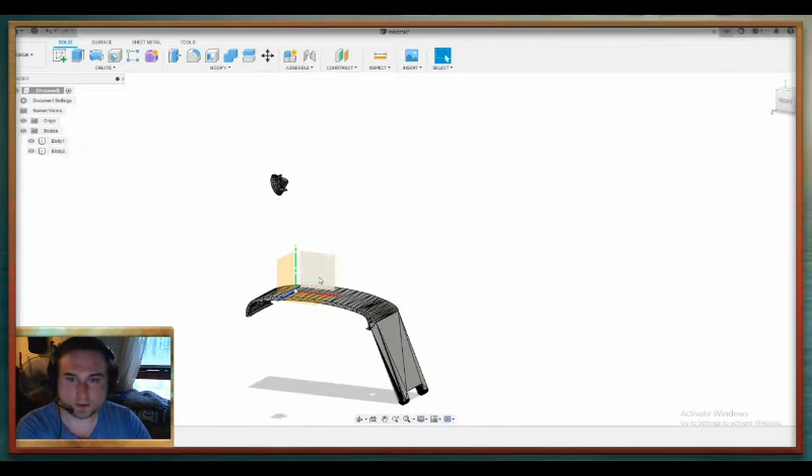This was requested by Gruntled Gaming. He's just trying to modify two pieces and put them together and align them to the origins and things like that. Now, one thing you'll notice when you import STL files off Thingiverse, a lot of designers don't build their pieces on the origin, which I find frustrating.

Fusion makes it a bit hard to fix this. I'll do another video straight after this in regards to doing it on Blender, which is actually a lot quicker and easier than through Fusion when you want to do this sort of stuff. Blender's also free, but I'll show you, for example, with this head strap mount.

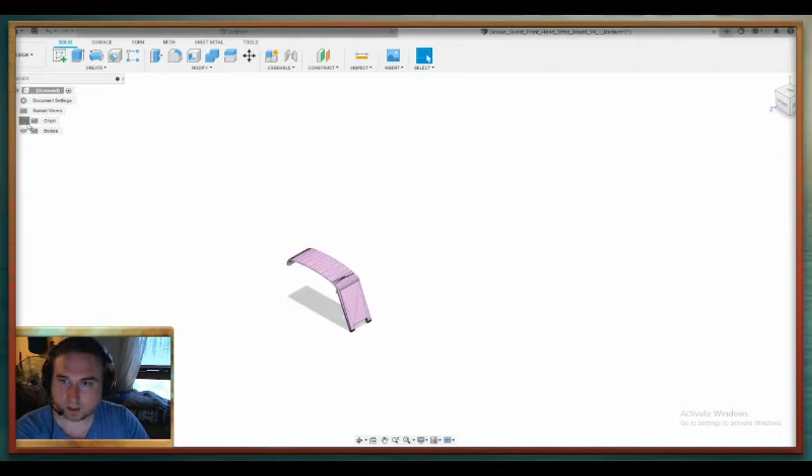If we turn our origin on, it's all the way down here, and then we've got this guy, but it's all the way down here. So it's frustrating because when you try and do certain scales and things like that, it doesn't work properly because they're not sitting on the same origin.

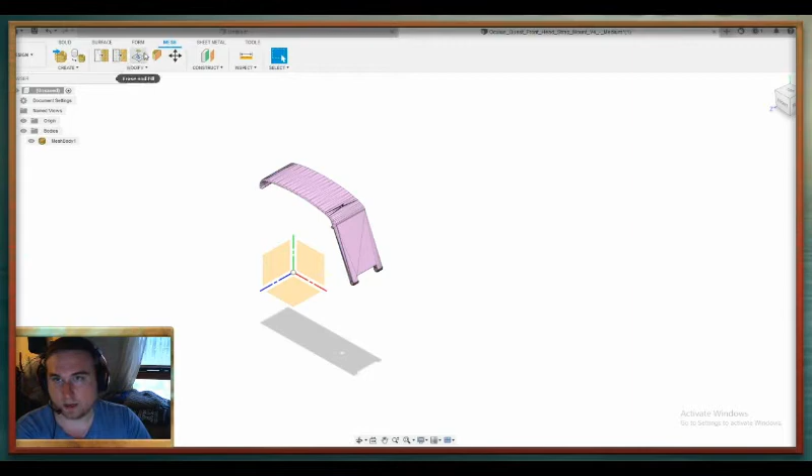Now, the first thing we want to do is turn this into a body, so we want to get rid of the mesh. It might be worth, before you do that, just giving this a quick go, like reducing faces, you can do certain things to reduce things by.

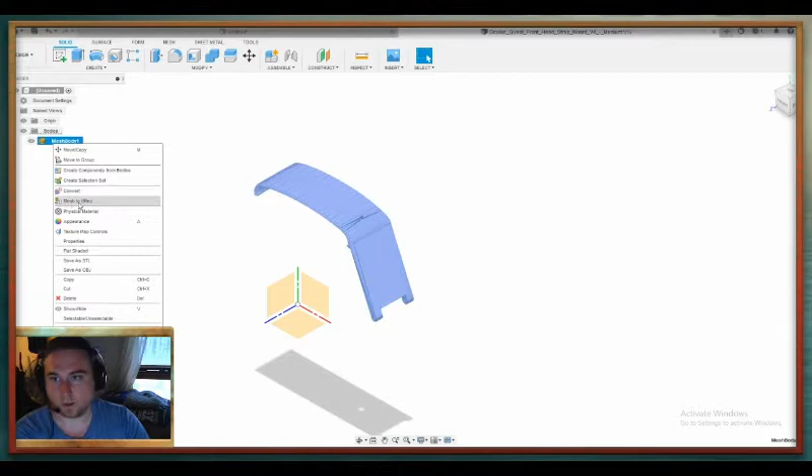Never mind. So what we want to do first is turn this into a body we can use. Remember, in the previous video, go to the solid menu, make sure your design capture history is off. You right click on it and do mesh to brep, boundary representation. That turns it into a body, new body. So now it's grey, that means it's a body.

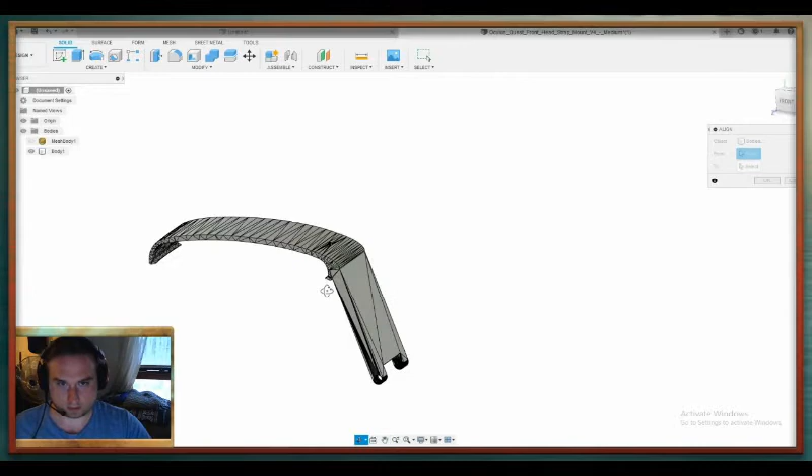We also want that other piece, but first we'll align this. The annoying thing about, it's handy but it's also frustrating about Fusion, is you can't align the whole body to origin. I mean, you probably can, but it's a bit more complicated. The align tool lets you choose a specific face.

You might be able to choose all of them? No, you have to choose a specific face. So what I mean by that is you have to grab this face, for example, and then that plane, and it aligns them with each other. So now that face is sitting on that plane.

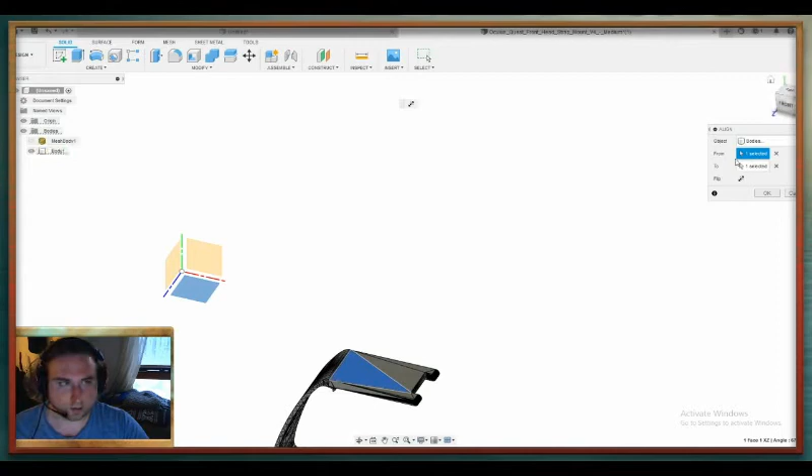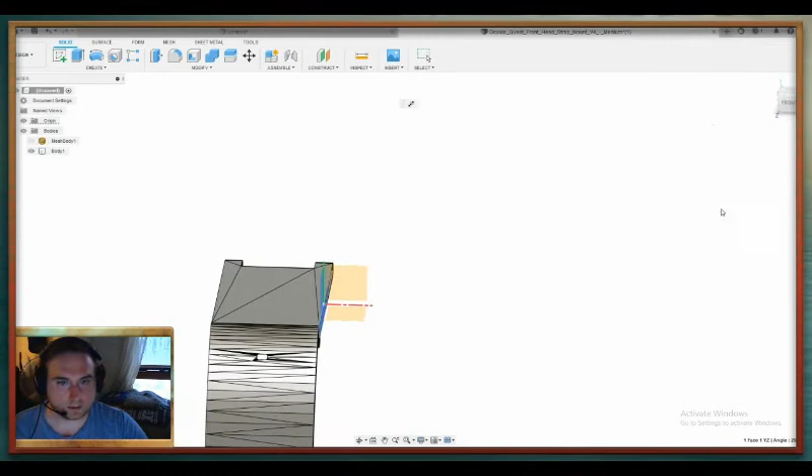If you want to do specific points, press OK, go align, grab this specific point right there, and tell it you want it on that. Then you can rotate it a little bit, and then we might want to just align this and that, or even this face and that. So now we have it aligned with this plane and this plane.

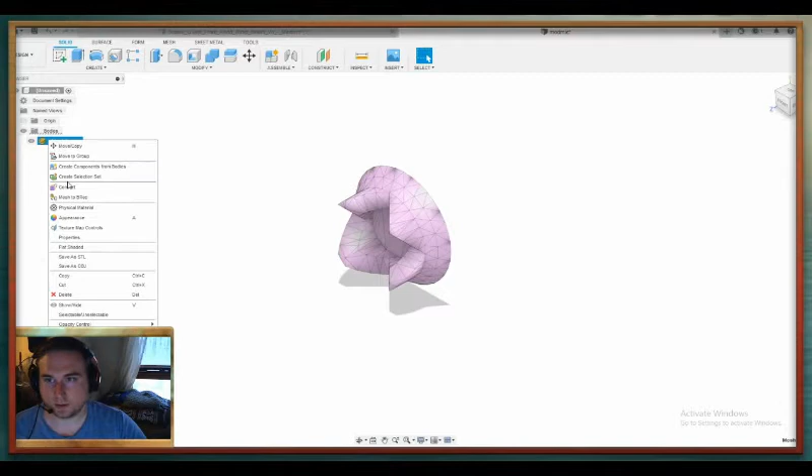And then if we want to put our second piece in, we're going to open. Now it's in a different plane again. You can convert it here or you can convert it in the other workspace. I'll just do it here.

We want to cut that body out, go over here, and paste him in here. He's sitting there now. We'll delete this. Oh, we want to accept that. Now you can, when you import things like that, align them that way, but it gets a bit clunky. Close that other workspace. So now we have two sitting here.

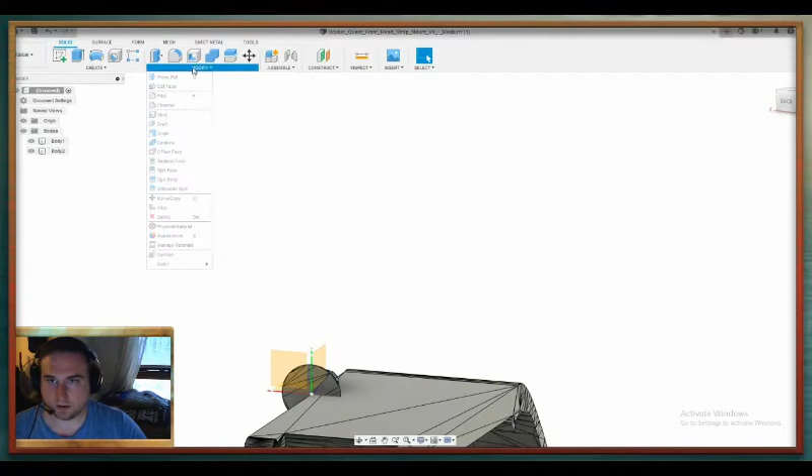So if I wanted to mount this on there, I could go modify, align, maybe grab that point there and that point there. Oops, that point there. No, sorry. That point there and that point there. Then I could also go that face and this face.

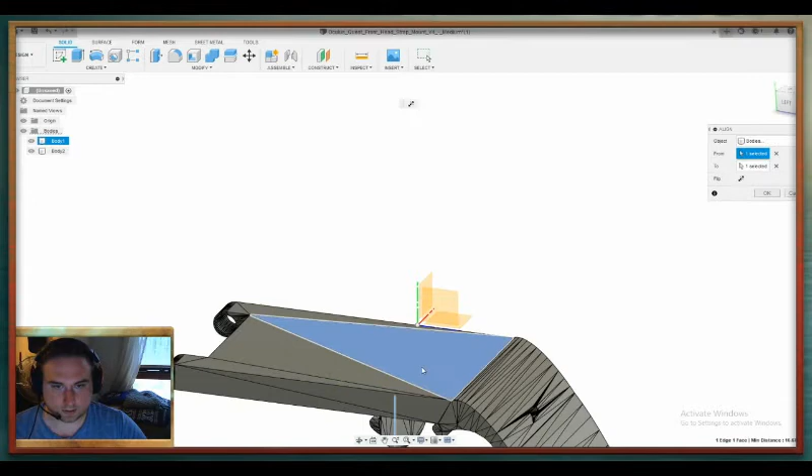It does this when you choose lines. Don't choose the lines like that. I want to flip that so it's sitting on top. Now they're sitting on the same plane, I can just grab this body and go modify, move and copy.

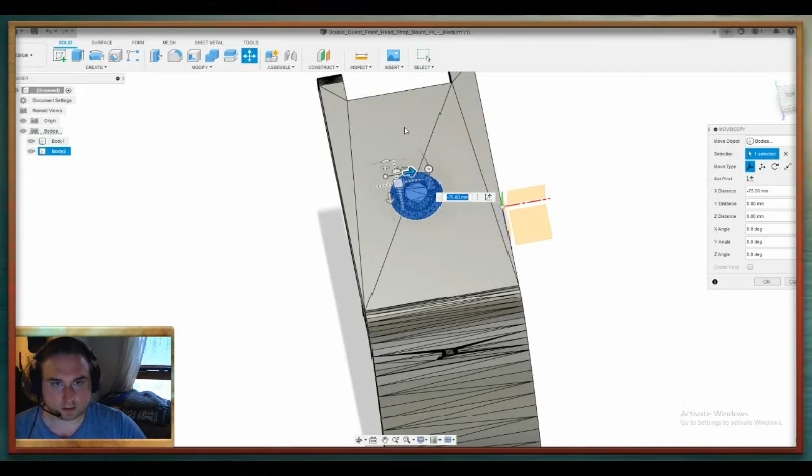And now I can just slide him around. So because they're touching, as long as I'm staying on this axis, as long as I don't go off on the Z, I can move that around where I need it. And then if I like that, yep, that's where I want to go. Boom, boom. Combine these two, join them, and accept. So now that is one whole body.

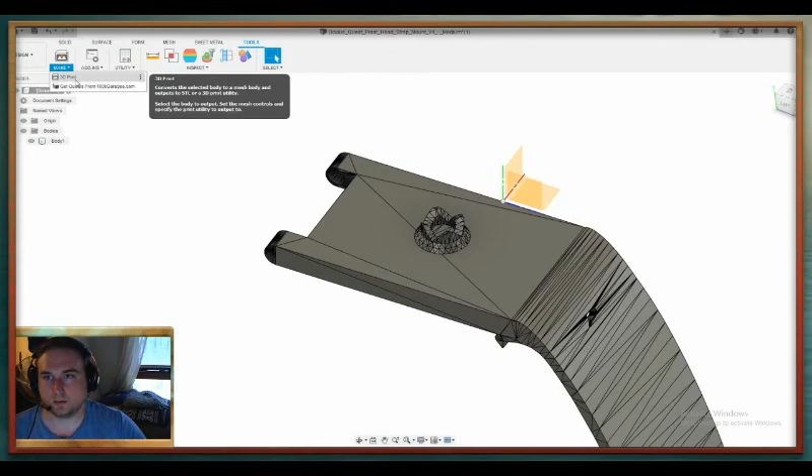See that combined? And then I can go and 3D print that by going make, 3D print, pick the body you want. Now that's one single body, and okay. And it saves it as an STL.

So that's how you import an STL, align it to your origins, and move it around. If you want to scale it, do it before you combine the two bodies. Or in theory, you could scale it all now if you wanted to, but it's going to scale both.

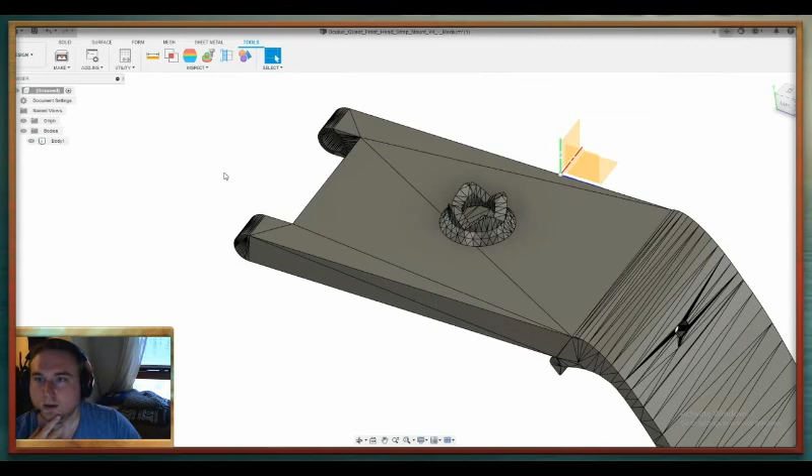And the other thing which I didn't do, make sure you turn your design history back on. That was a mistake on my behalf because now I can't really undo stuff. But there you go, I hope that helps.